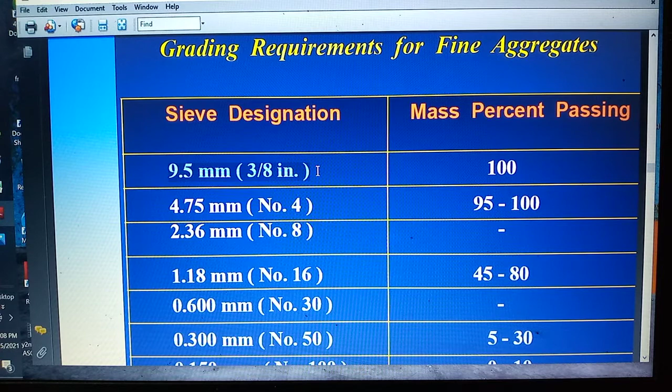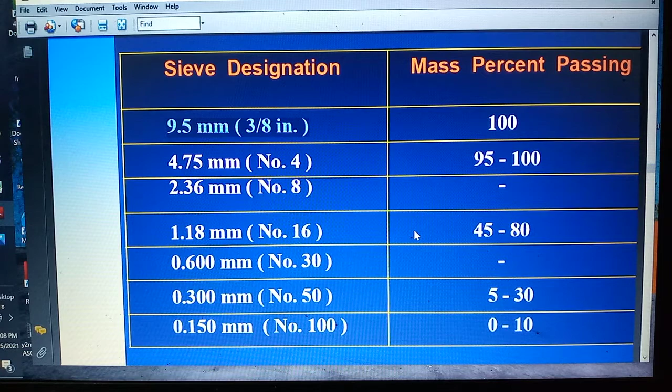So this is the Philippine standard, according to DPWH standards, the latest standard.

This is the significance of proper sampling. Test results on concrete samples reflect the actual strength of the structure. When we say we take a sample, we assume that the sample we got from the field, getting just a little bit, represents our material, to measure whether we passed the minimum requirements, especially strength requirements.

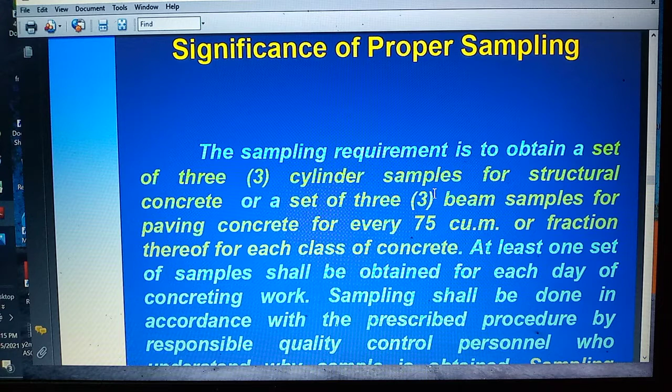Meron tayong sampling natin. Ang requirement natin is to obtain 3 cylinder samples for structural concrete, beam samples for paving concrete for 75 cubic meter or fraction thereof.

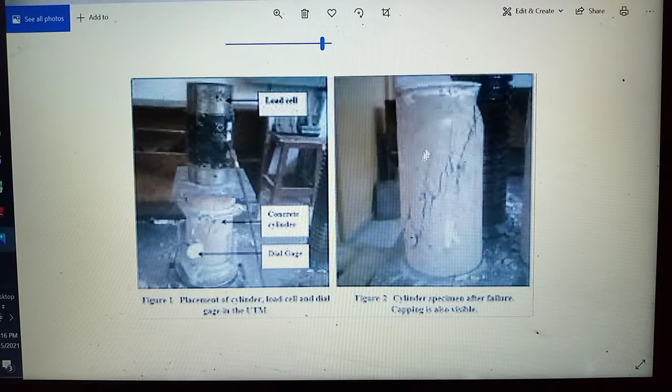Speaking of that class, ganito yung sampling natin. Yung cylinder samples pala is ganito yung forma niya. Papakita ko lang, ito yung forma ng cylinder mo. Okay, maghanap tayo ng ibang picture.

Actually, tested na to. Originally, cylinder to, tinetest yung strength niya, kaya nilalagay siya sa universal testing machine, at binibreak doon sa laboratory, tinetest kung pasado ba siya sa compressive strength. Pag nagsabi tayo ng concrete cylinder, compressive strength yung sine-check natin. So previously, nalaman natin ano yung minimum requirements ng compressive strength, sa iba't iba, depende sa type, depende sa class ng concrete meron kayo.

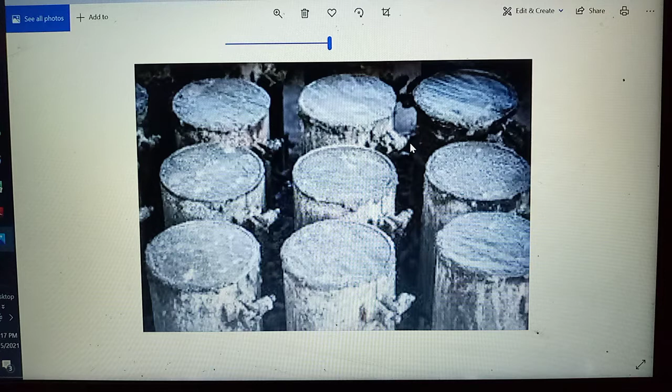Tingnan natin, I apologize. Okay, ito, marami pa. Yan, yung concrete sample habang nasa molds pa siya, kung cylinder molds pa siya. Siguro in the future, pag nagpunta kayo sa site, makikita nyo tong cylinders, cylindrical samples. Okay, let's proceed na.

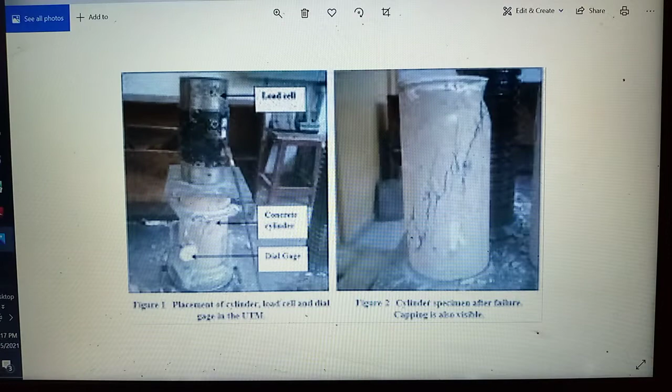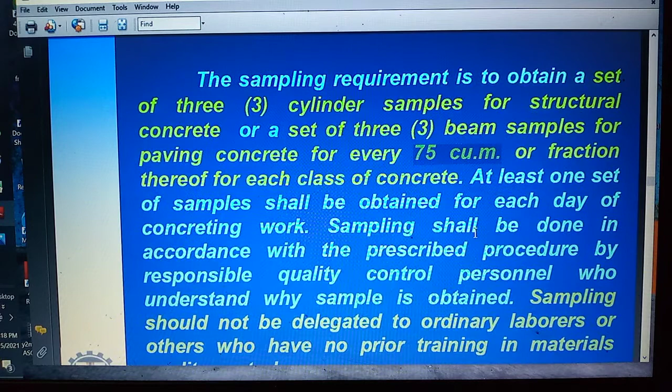Okay, so ito, for every 75 cubic meter, kailangan mo ng 3 sample, isang set yan. Dapat 3 cylinder samples per 75 cubic meter, or dito dapat, hindi ko nasabi, so every 75 cubic meter or 1 day work. Pag hindi umabot ng 75 cubic meter yung nabuhos mo sa isang araw, for example, magre-represent ka pa rin ng 3 cylinder samples. So at least 1 set shall be obtained for each day of concreting work.

Sampling should not be delegated to ordinary laborers or others who have no prior training in materials quality control. As sinabi ko na, ang professional na nag-oversee dito is usually yung mga materials engineer.

Okay, so if ever na makapasa kayo class ng civil engineering, you can, and then you have some experience na, you can also take an additional exam, parang board exam din, pero hindi PRC, galing sa BRS, nakalimutan ko na, Bureau of BRS and DPWH. Dalawang sangay ng pamahalaan na magbibigay sa iyo ng additional accreditation license na tinatawag na materials engineer, in which I would say that I am one of them. Then mas mabuti yung marami kang lisensya class nang sa ganun is marami ka ring income. But somehow, I would say na mas mabuti pa rin na madiskarte kayo bilang engineer in the future, mas nakakayaman yun. Anyway, let's proceed.

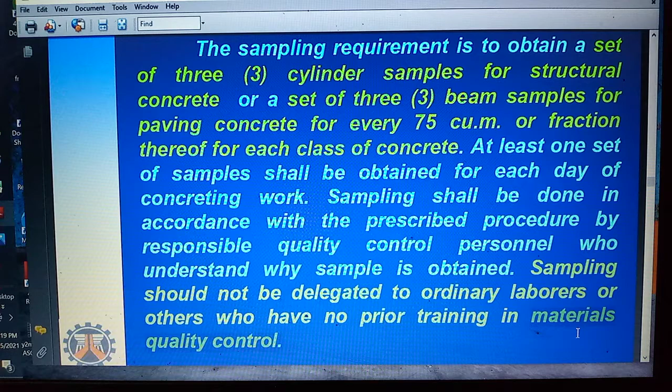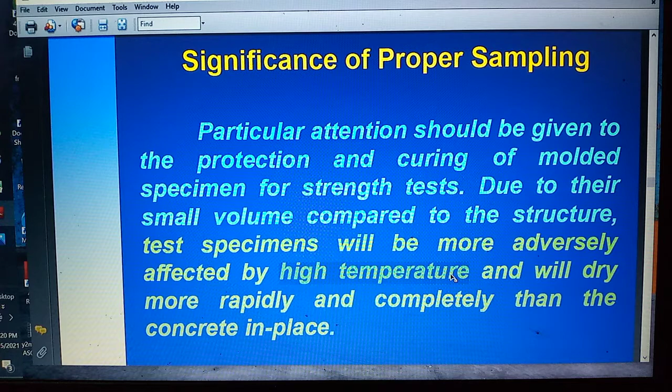So ano ba yung significance ng proper sampling? Particular attention should be given to the protection and curing of molded specimens for strength test due to their small volume compared to the structures, so they were affected by high temperature and will dry more rapidly than concrete in place. Kaya yung sample natin, yun yung representative ng binuhos natin na concrete, kaya dapat alagaan natin, naalagaan yan, parang binibaby kumbaga, para mag-produce ng mataas na strength.

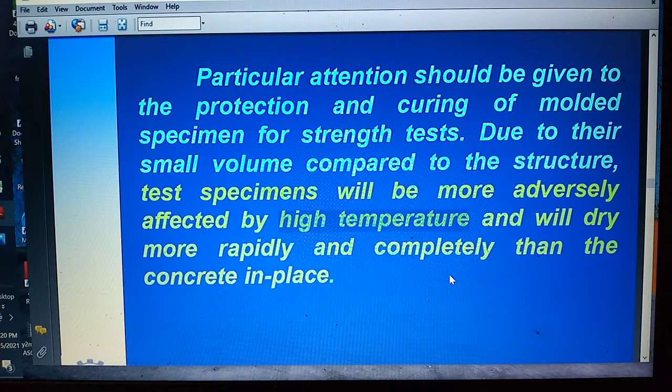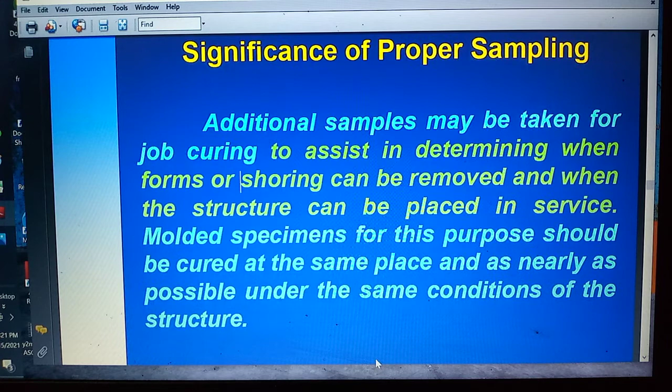So additional samples may be taken for job curing to assist in determining when forms or shoring can be removed. Pag sinabi mong forms, yun yung forma, at yung shoring, yun yung suporta para hindi bumagsak yung fresh concrete mo on site. Medyo verbose na to, kayo na lang magbasa, pwede nyong i-pause sandali itong video at mabasa nyo ng maayos.

So yun yung significance ng sampling, kailangan mo ng samples as a representative of your concrete na nabuhos mo sa site, whether it is paved or sa highway or sa building o any type of structure na ginagawa mo, for every 75 cubic meter or 1 day of work or fraction thereof.

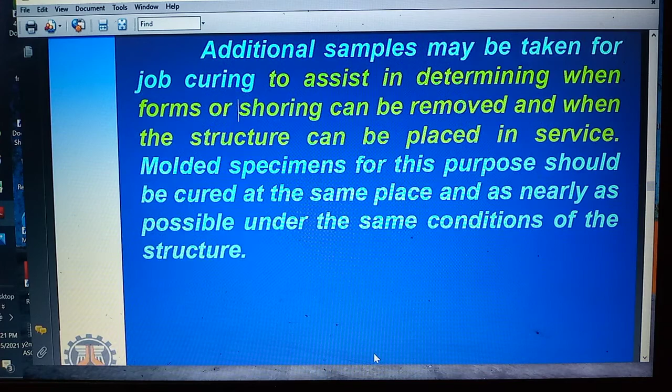So during early stage of the work, more than the usual number of concrete samples shall be obtained. The extra samples should be tested at earlier dates to determine the trend of strength development. So before that, actually, yung minimum requirements ng DPWH is kailangan meron tayong 3 samples per 75 cubic meter. Paabutin natin ng 28 days saka natin i-break.

Pero posible din if the materials engineer will determine para mas accurate yung pag-test, yung intindihan natin yung strength ng concrete on site, pwede kang maglagay ng additional cylinders para sa 7 days, 14 days, at 21 days before 28 days. Yung 28 days dapat 3 yun, pero yung sa 7, 14, 21 pwede tag-isa lang sila. Actually depende yan sa prerogative ng materials engineer.

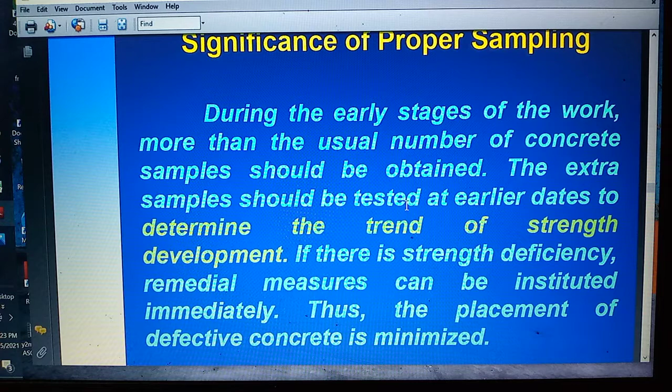So whether the materials engineer is nasa contractor or yung representative ng government agency, pag yung project nyo is government, governed by government agency just like the DPWH or any type of agency. But somehow kahit sa ibang agency, yung blue book pa rin yung nagsa-stand, galing pa rin kay DPWH yun.

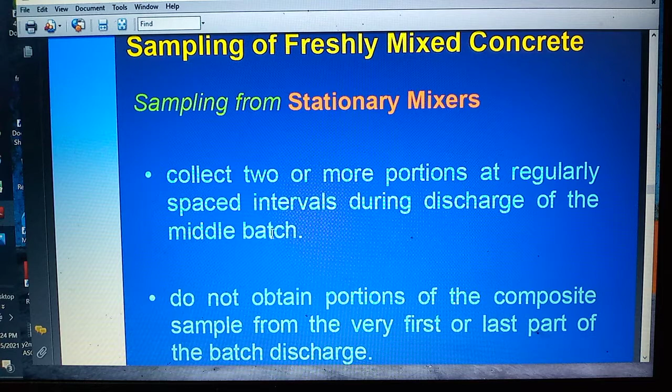So, sampling of freshly mixed concrete. You can collect 2 or more portions at regular spaced intervals during the discharge of the middle batch. Given that your first batches are like trial batches pa lang, kumbaga, tinatantsa nyo pa kung gaano kadaming tubig, graba, buhangin, at cement ang gagamitin, lalo na pag volumetric yung planta nyo, ang dapat kunin ay yung nasa gitna, yung middle batch, hindi yung nasa unahan o nasa hulihan. So do not obtain portions of the composite sample in the very first or last part of the batch discharge.

Kaya dapat nasa gitna. For example, nagbuhos kayo, may 10 mixer yung ginamit nyo, or let us say 50, mas mabuti kung magkuha ka ng sample doon sa ika-20 plus or ika-30 plus na batch. Hindi yung nauna o nahuli.

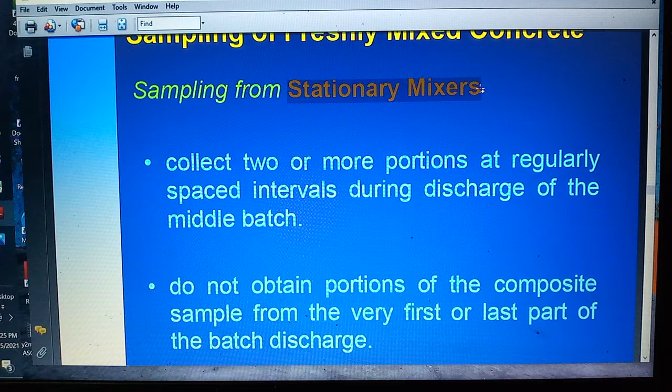Yun ay para sa stationary mixers. May I correct myself - pag sinabi nating stationary mixers, yun yung hindi tumatakbo na mixer. For example, yung ordinaryong bagger mixer, stationary yun. Pero yung revolving drum mixers or agitators, yun yung mixer na tumatakbo. Nakikita nyo ba yung mixer na may truck tapos may revolving drum sa likod?

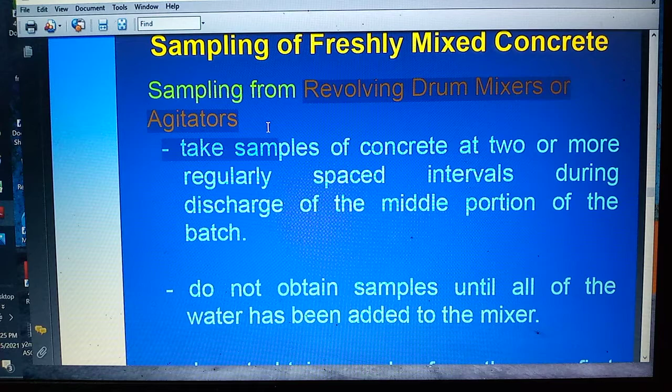Yun. So ganun pa rin, dapat mag-take ka ng samples at 2 or more regularly spaced intervals sa middle portion pa rin. At hindi pa rin pwede sa unahan at hulihan.

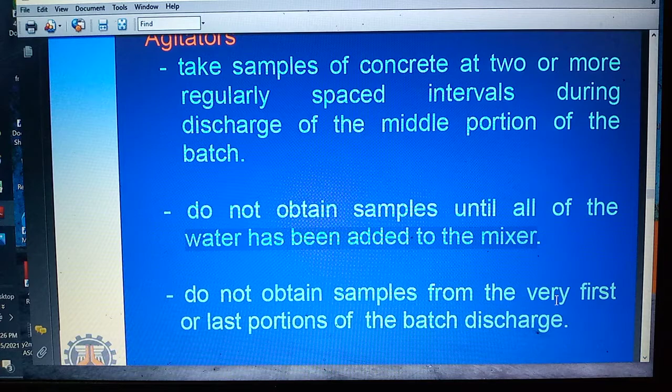At saka, one thing is kailangan yung samples mo ay nadagdagan na ng tubig, of course. Do not obtain samples until all of the water has been added to the mixer. And then, as sinabi ko na, dapat nasa gitna kukuha ng sample, hindi yung nasa unahan o hulihan.

Speaking of sampling requirements, we have the control of consistency. The consistency of the mixture should be checked frequently by the slump test. Ano ba yung slump test? Kayo na lang magbasa nito.

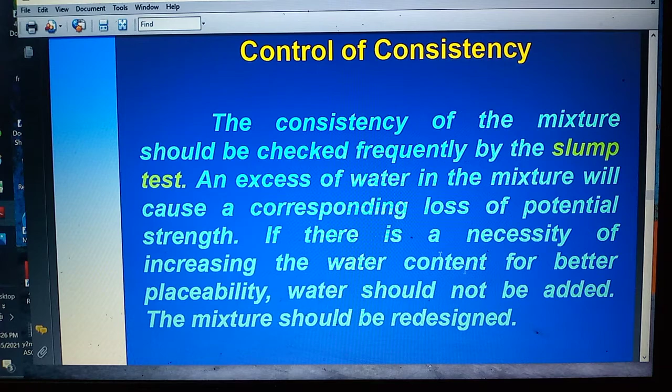Parang ganito. Ito yung test ng slump test. Maybe meron akong video dito, papakita ko sa inyo yung slump test.

Today we'd like to demonstrate the ASTM C143 specification, commonly known as the slump cone test. The tools we need for the test are a slump cone, a flat non-absorptive surface, a scoop, a tape measure, and a rod. Yan yung mga gagamitin sa slump test.

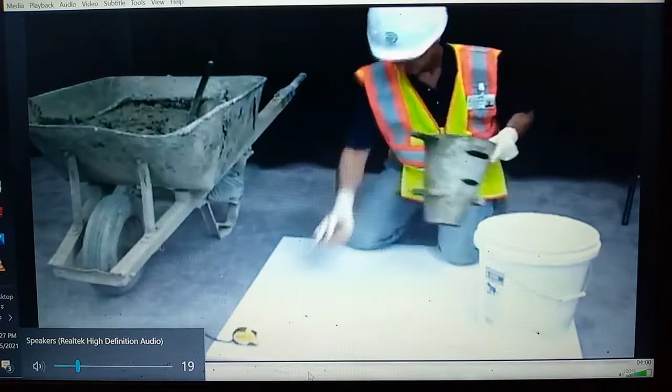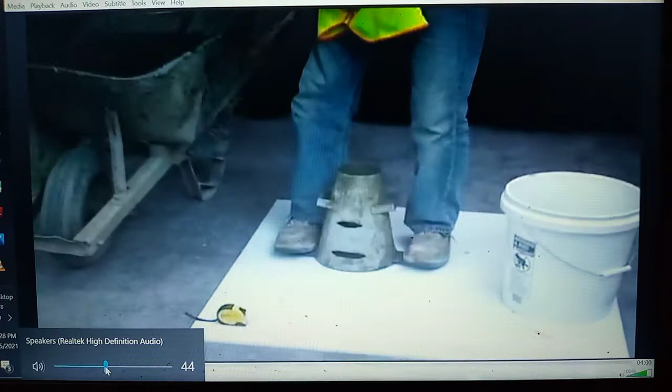We will begin the test by dampening the interior of the slump cone and the base. Place the mold on a rigid, flat, level surface. Hold the mold firmly in place by standing on the two foot pieces on either side of the mold. Using a scoop, fill the cone in 3 equal layers by volume, moving the scoop around the perimeter of the cone to ensure an even distribution of concrete.

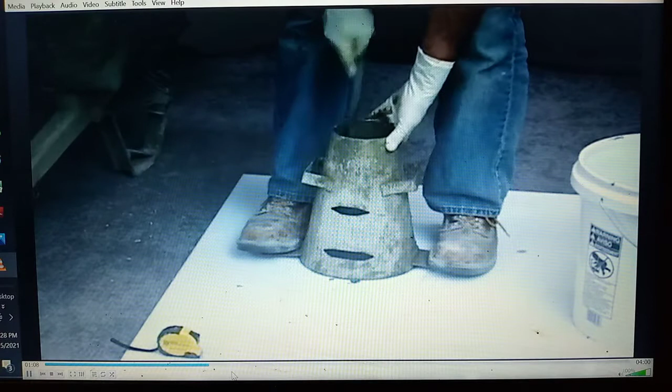After filling the first third, rod the layer 25 times for each step, uniformly distributing the strokes over the cross-section of the layer. Incline the rod slightly, starting near the perimeter and progressing spirally towards the center.

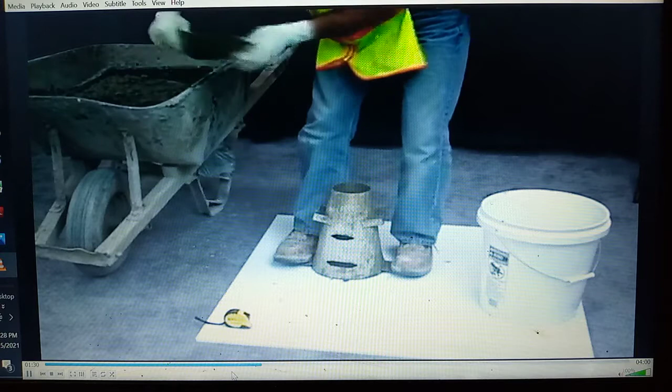Next, fill the second third of the cone by volume, moving the scoop around the perimeter. Rod the layer 25 times, making sure to penetrate into the first layer approximately 1 inch. Uniformly distribute the strokes over the cross-section of the layer. Fill the remaining third with concrete, filling it slightly over the top of the cone.

So, 3 layers yan, class, then 25 tamps each. Rod the layer 25 times, making sure to penetrate into the second layer approximately 1 inch. If at any time the concrete falls below the top of the mold, add additional concrete to keep an excess above the mold. Continue the rodding count from the value reached before the concrete was added.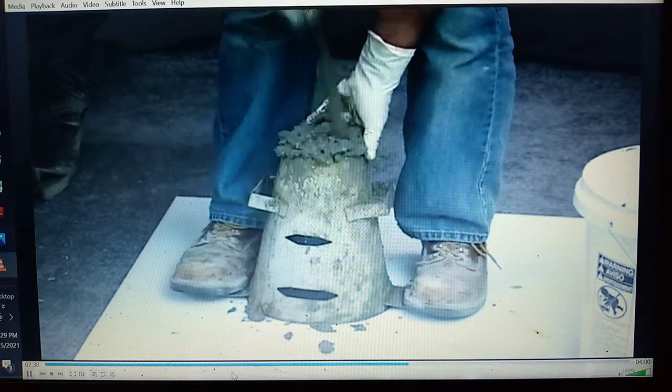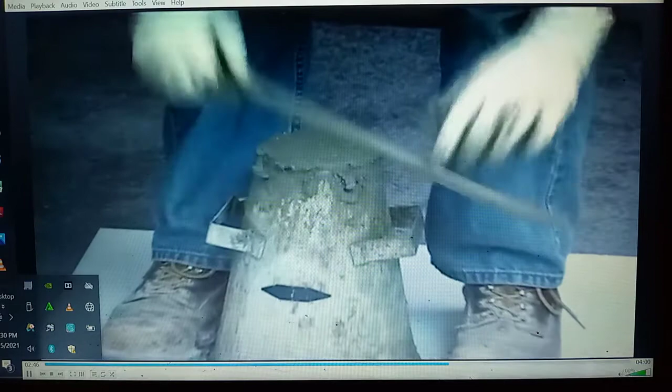Strike off the surface of the concrete with the tamping rod in a screeding and rolling motion. While maintaining downward pressure, remove any concrete which is collected around the base of the cone.

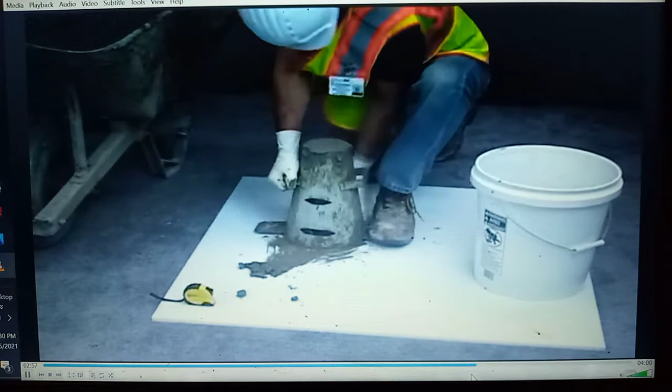Raise the cone in a steady vertical direction over a time frame of 5 plus or minus 2 seconds. Counting: 1, 1000, 2, 1000, 3, 1000. So we remove the mold.

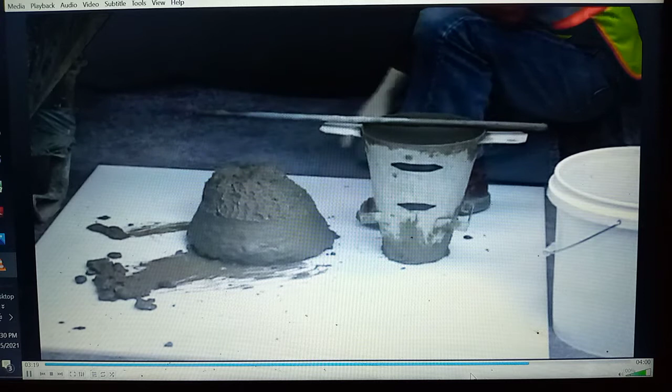What we are now looking for is the shape of the concrete. I am looking to determine if the concrete has sheared off to the side. If that were the case, this would be an invalid test, and I could rerun it using a different sample. As we look down at our sample, that is not the case, so we can proceed.

We will use the mold and the tamping rod, measuring from the bottom of the tamping rod to the original displaced center to the nearest 1/4 inch. In this test, our slump is now 5 3/4 inches, and we can record the results.

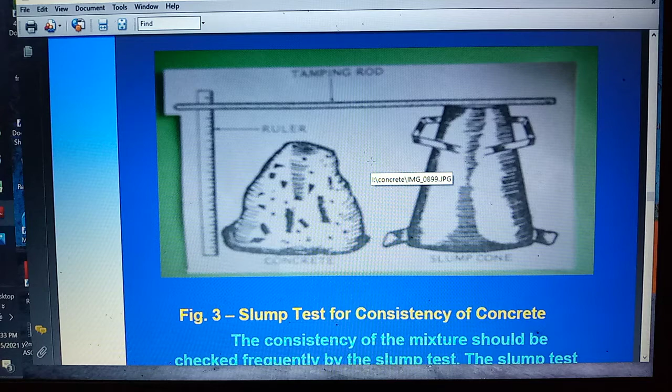Speaking of slump, usually your slump can be considered safe when the concrete is okay - not too watery and not too much water content - when your slump is 2 inches or less. That should be your standard, especially for highway structures or buildings. It should be 2 inches, and will not exceed 2 inches for highway.

So it's an indicator of your water content or water-cement ratio. This is our minimum requirement.

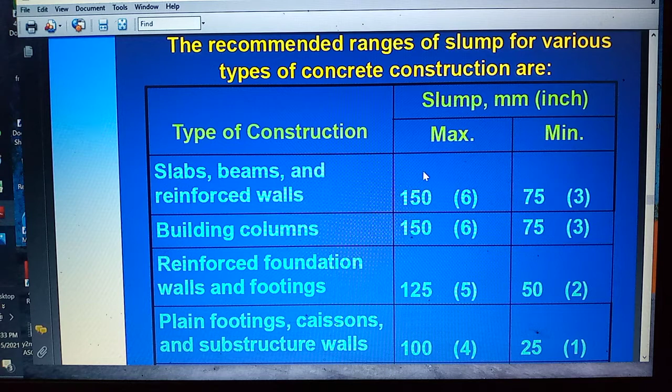It depends on the recommended range for the slab. For slabs, beams, and reinforced walls, you have 3 to 6 inches or 75 to 150 mm. That 2 inch figure I mentioned is for general highway use. For building columns, it's also 3 to 6 inches. For foundations, it's 50 to 125 mm or 2 to 5 inches.

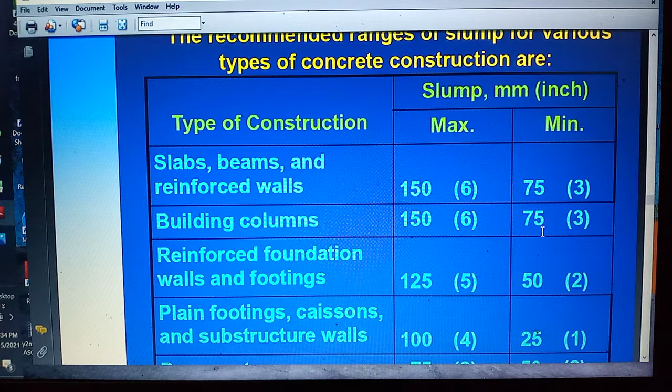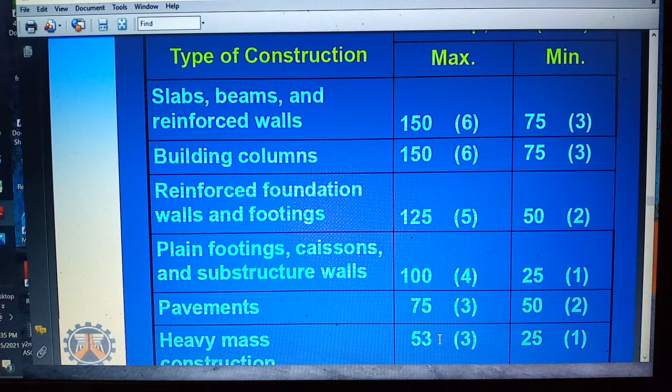For plain footings, caissons, and substructures, 25 to 100 mm. For pavement, as I mentioned, 2 inch minimum to 75. For heavy mass construction, it is 25 to 50. The safest maximum is 50 - that's a rule of thumb for heavy mass construction, the large-scale pouring of concrete.

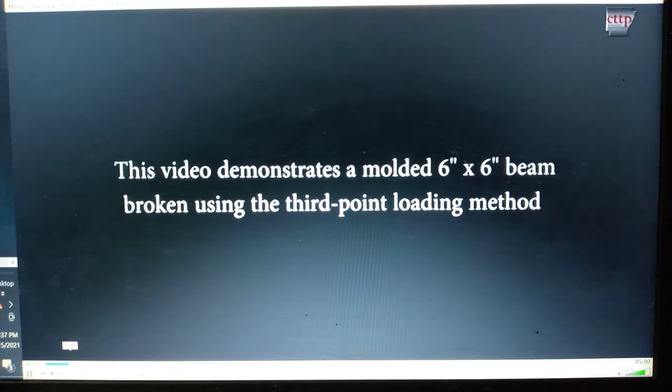Okay, sensya na, wala yata dito.

Okay, so ganun yan. Actually hindi 20 kundi 18 lang pala. So 3 layer din, ganun din yung gagawin mo. 3 layer yan, then mag-stamp ka ng 18 times in each layer. Pagkatapos, sa bawat layer dapat tumagos siya hanggang ilalim. Sa parehong paraan, dapat sa gilid ka muna magsimula mag-stamp, at pagkatapos doon sa gilid, iikot siya hanggang umabot ka sa gitna. Aabot siya ng at least 18 stamps per layer, 3 layer din.

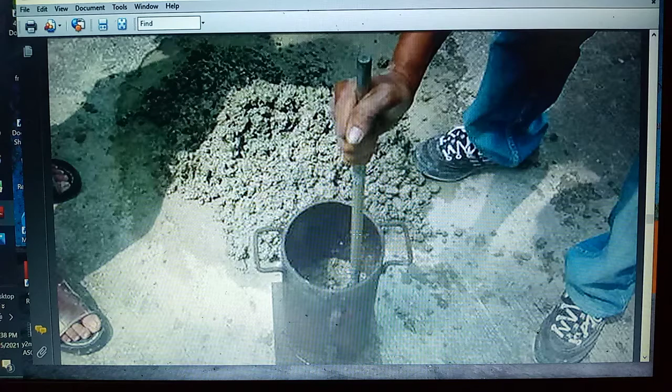Okay, ganyan. So ito yung casting of cylinder specimen. Sinabi ko na meron kang 3 layer, then 25 stamps each. 3 layer yan. At ganun din, 25, katulad pa rin doon sa slump cone.

Ang kaibahan lang sa slump cone is kailangan mo siyang ilipat tapos ituwad. Ito, gagawin mo talaga siyang samples. You will take it in an area na hindi siya masisikatan ng direct sunlight for future purposes, for testing purposes.

Okay, so speaking of curing of concrete samples. So this is to prevent evaporation of water. Cover the specimens with either a non-absorptive, non-reactive plate, or a sheet of tough, durable, impervious plastic. Then remove the specimen from the molds 24 plus minus 8 hours, meaning 16 to 32 hours after casting.

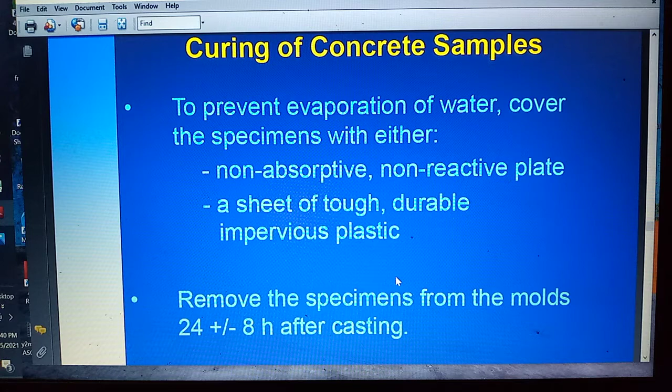Yan yung pag-cure natin ng concrete sample. So sinabi ko na, pag sinabi natin cure, parang ano natin ba? Parang curing of samples is treat natin yung samples natin, inaalagaan natin nang sa ganun hindi siya masira kahit bago pa siya i-test, kaya kinocure natin. As we proceed, mas maintindihan natin itong meaning ng curing.

Okay, so specimen shall be moist cured. Ito yung requirements niya. Pag moisture cured siya, 23 plus minus degrees from the time of casting until the date of testing. Storage during the first 48 hours of concrete shall be a vibration-free environment, dapat wala siyang vibration sa first 48 hours. Tapos yung temperature naman, 23 plus minus 2 degrees, so 21 to 25 degrees. Dapat i-store siya sa place na hindi mainit at hindi rin ganun kalamig.

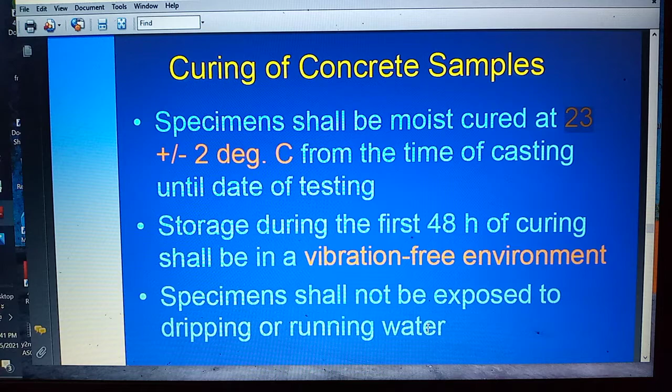Specimen shall not be exposed to dripping or running water, dapat hindi siya exposed sa running water. Then after 4 to 7 days, pwede mo na siyang i-ship doon sa kung saan siya iti-test sa testing laboratory. Dapat meron kang damp sawdust or hay straw, nang sa ganun hindi siya mag-break, hindi siya lulukso-lukso kapag tumakbo na yung sasakyan mo na magdadala ng samples doon sa laboratory.

At ulitin ko, yung pag-test ng materials is 28 days para sa cylinder at 14 days para sa beam. Okay, 28 days cylinder, 14 days para sa beam.

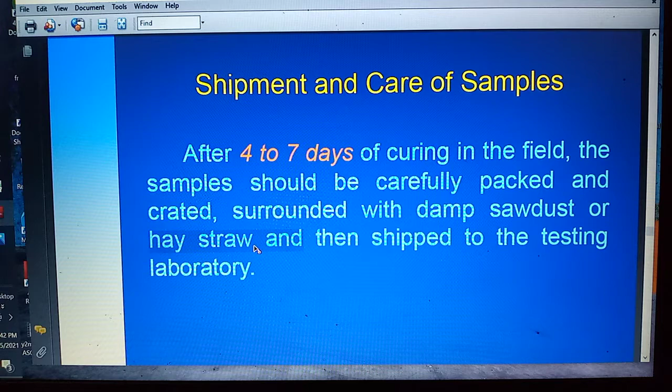Okay, so testing of concrete samples, significance of proper testing. Test results on concrete samples reflect the actual strength of the structure. So if the testing of the sample is incorrect, the results may be unsatisfactory but the concrete may actually be structurally sound.

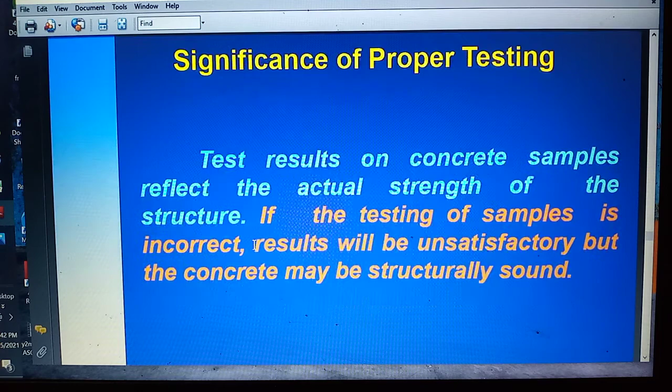So causes of unsatisfactory test results of sample, ito yung dahilan kung bakit unsatisfactory yung result ng sample natin. Number 1 is yung compaction ng sample. Baka hindi tama, baka hindi umabot ng 25 stamps per layer, o hindi mahina yung pag-mix mo using tamping rod.

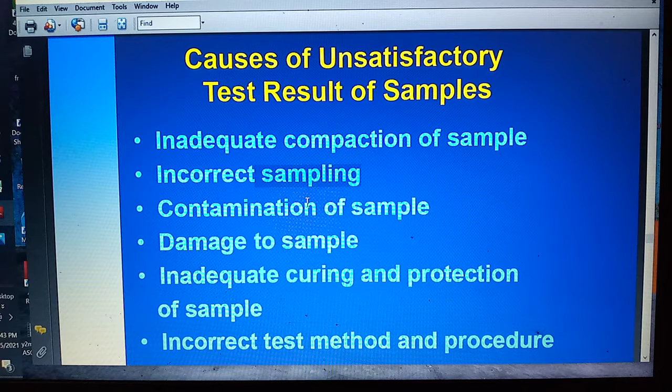Then incorrect sampling, mali yung pag-sample mo, baka doon ka kumuha sa unahan o sa hulihan at hindi sa gitna ng batch. Then contamination of sample, for example nahaluan ng lupa, nahaluan ng deleterious materials. Then damage to sample, yung siguro sample mo is na-mishandle kaya nasira, nagbitak na before pa ma-test. Then inadequate curing and protection of sample, so hindi mo na-cure. Then incorrect test method and procedure.

Speaking of curing, meron tayong dalawang klase: air curing at water curing. Yung samples natin, whether cylinder or beams, is nilulubog natin sa curing tank, parang isang maliit na swimming pool, doon nilulubog yung mga samples hanggang sa iti-test siya.

So incorrect test method, inaccurate test result, this is laboratory caused, by improper handling or improper method sa laboratory. Then yung mixed samples, possibly marami kang project tapos nag-mix na para sa project. By project yan, pag engineer ka malalaman mo na by project yan, so ibang project, iba dapat yung samples. Baka naghalo yun, baka sa isang project mo mas maliit yung strength requirements at nalipat doon sa building na project na mas malaki yung strength requirements. Baka yung isang project mo is 3,000 PSI lang yung minimum f'c at doon sa kabila 4,000 PSI, kaya nagkamix.

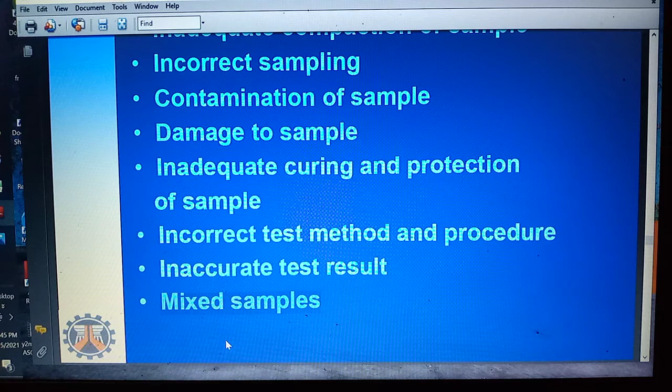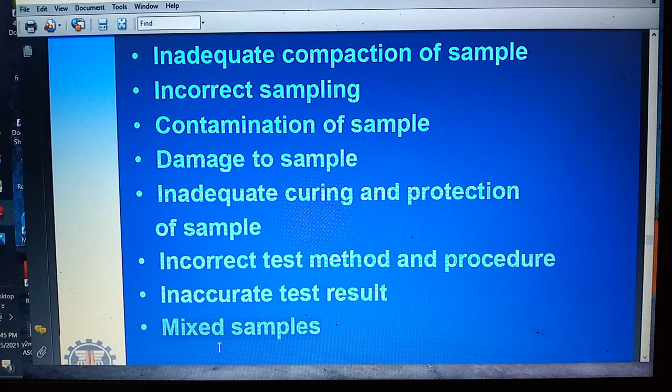So I guess mahaba na yung napag-usapan natin sa video na ito. So maybe ipagpapatuloy natin yung talk in the next video, sa fourth part ng ating topic about concrete. Okay, so stay tuned.